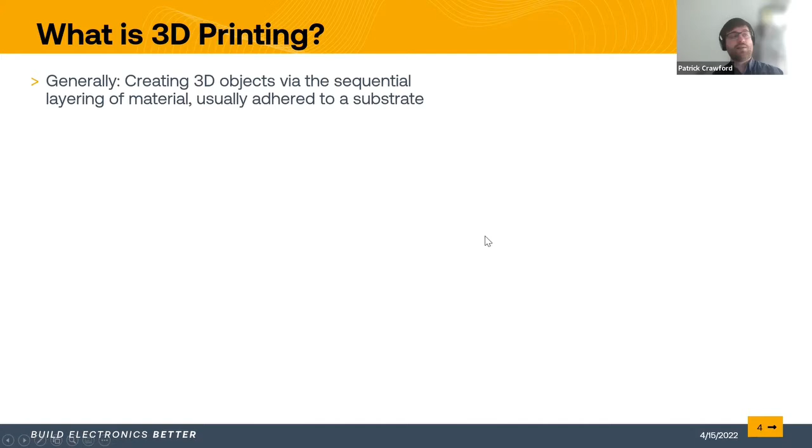And say, no, additive manufacturing can include etching and deposition. And I say, I've never heard a chemical deposition system referred to as a 3D printer. But you're going to hear it used interchangeably.

A wide range of industrial applications, way too many to include on one slide. We'll get into them, but suffice it to say it is useful from prototyping all the way through production.

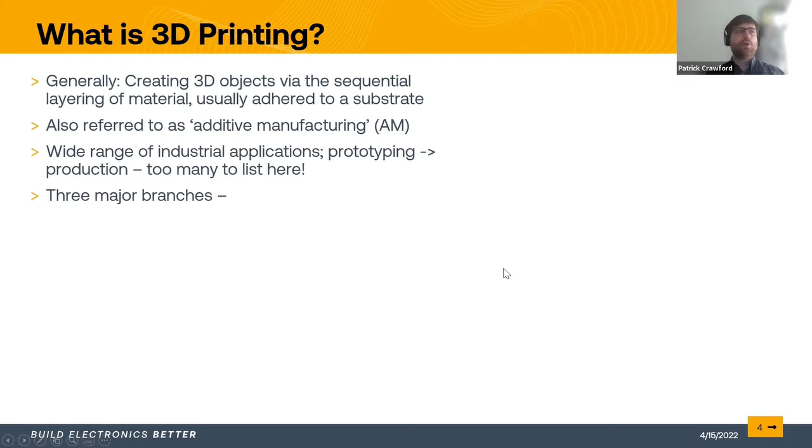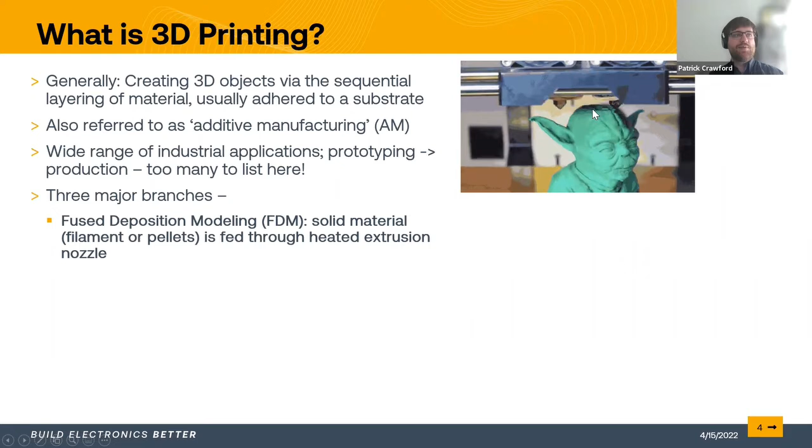So there are three major branches of 3D printing, if you will. Fused deposition modeling, or FDM, is when a solid material—either a filament or, in very rare instances, pellets—is fed through a heated extrusion nozzle. You can see here the nozzle depositing material as Yoda is being printed.

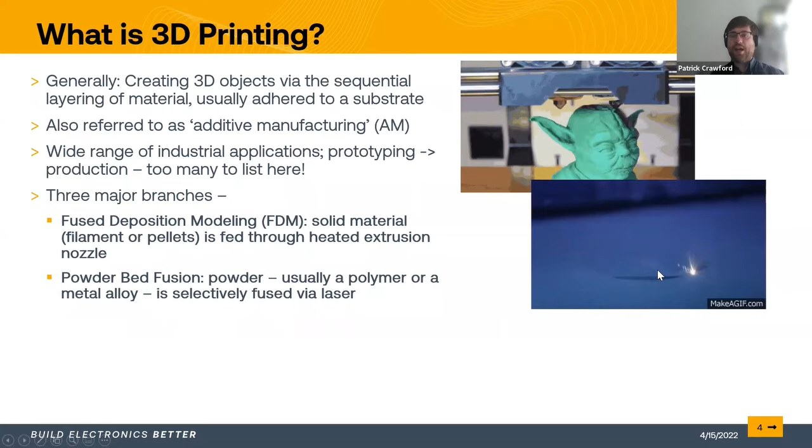Powder bed fusion: powder, usually a polymer or a metal alloy, is selectively fused via laser. You can see it's being rastered back and forth, actually fusing the powder together. That's a metal powder in this case, but it doesn't have to be metal.

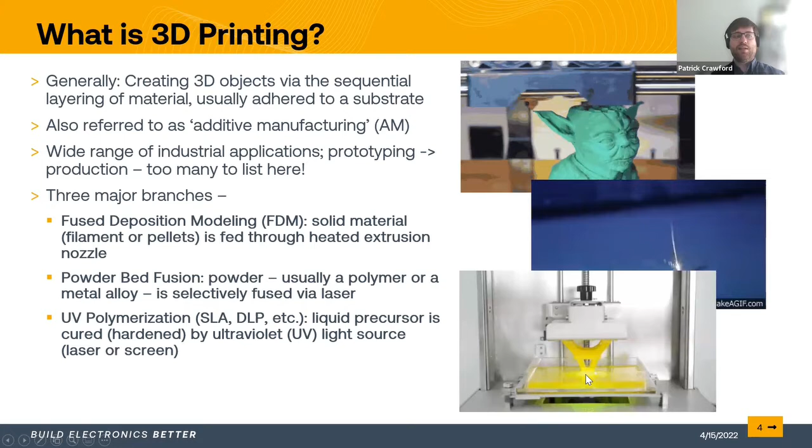And then UV polymerization—SLA, DLP, again we'll get into those initializations—a liquid precursor is cured or hardened by an ultraviolet light source. In this case there's an ultraviolet light below, and it is hardening as it moves up.

Okay, so I think it's really important to give context on the history of 3D printing, just to impress upon all of you how rapidly the last 5 or 6, 10 years have seen the proliferation of desktop and hobby-level 3D printers, and on the industrial side, the reduction in cost of these industrial scale machines that perform additive manufacturing.

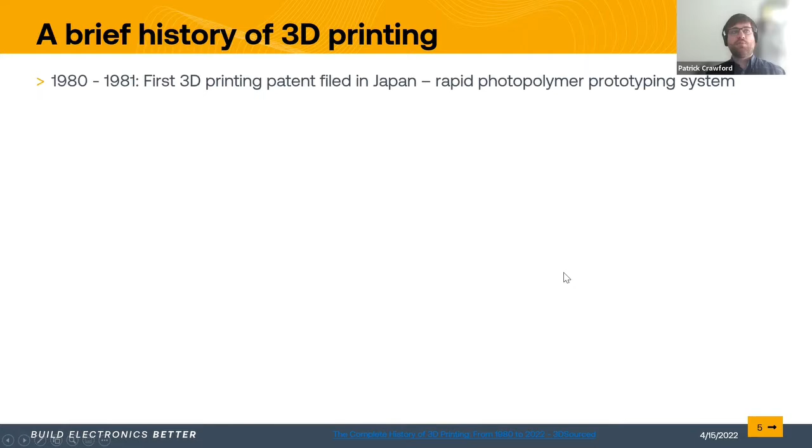And then in 1997, Aeromat patented and sold the first selective laser sintering machine, which could fuse only one metal: titanium alloys. That's it, no other metals. So up until that point, the average cost per unit—industrial, since there were no hobby units yet—was about 40 grand, not adjusted for inflation.

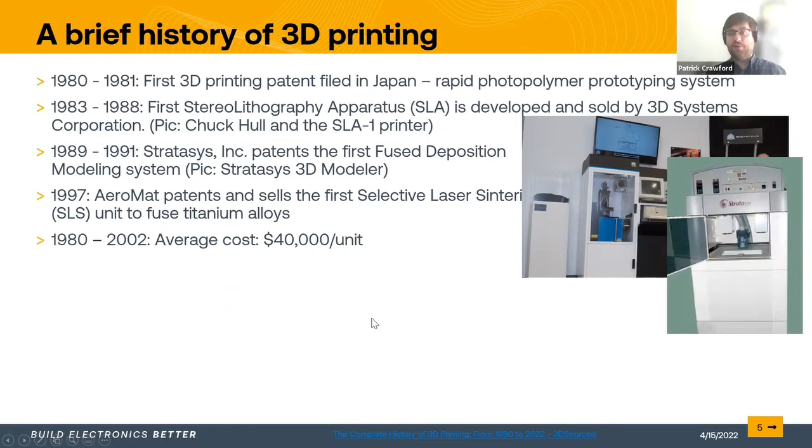In 2005, the RepRap project launched. The way they got around the Stratasys patent on FDM was they just said, here's some instructions on how theoretically one could build a printer. Have fun. Most of the parts were off the shelf, some were printed by other printers that your friend might have, and the control boards, which weren't necessarily patented, were sold by RepRap or authorized distributors.

However, in 2009, that patent did expire, and a couple of different things happened all at once. Thingiverse debuted, and MakerBot released the first, like, this is a 3D printer that we are selling kits.

And in 2014, similarly, the SLA and SLS patents expired. So since 2014, eight years ago now, the explosion in consumer level 3D printers of all flavors and the industrial explosion of 3D printers of all flavors have been due to these patents expiring. Now the average cost of printers, taking into account a wide variety of consumer level printers, is only about 350 bucks, with bigger build volumes and better quality than any of these industrial machines in the 80s and 90s ever had, give or take.

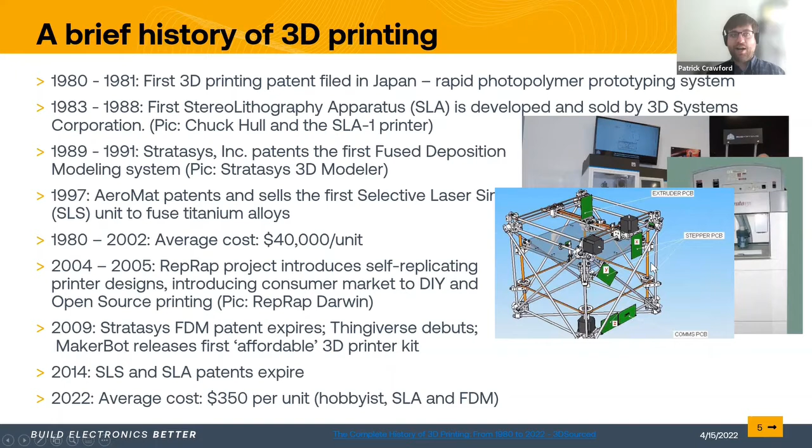What I'm not going to mention is all of this that has happened in the history of 3D printing. Scan this, Google something if you want. It's insane what has happened.

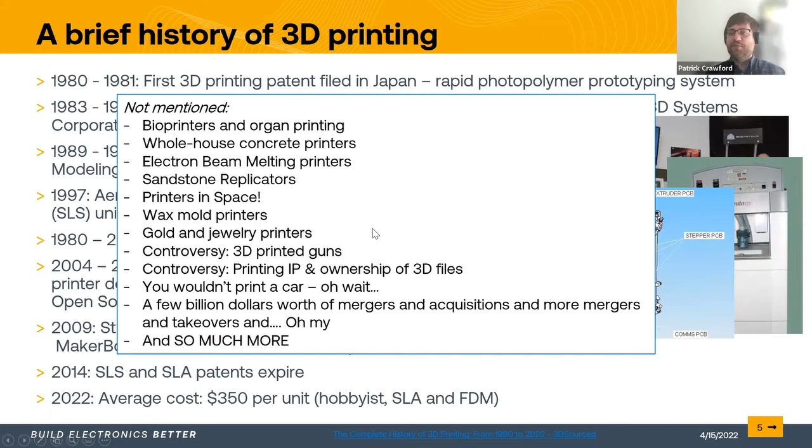A couple of highlights: the 3D printed gun controversy that is still ongoing. Who owns files, right? If I put a file on Thingiverse and then you print it and sell that print, do I own it? The answer is no, but there are similar IP issues, and all sorts of fun advances in the space of 3D printing.

So like I said, there are three arterial branches of printing: FDM, UV, and powder bed fusion. Within those, there are distinct technologies that have different applications. FDM is kind of just its own stub, its own truncating artery. There's different kinds of FDM printers, but it's the same basic technology.

UV does have a few different branches, though. They have SLA, which is stereolithography apparatus, digital light projection or DLP, and material jetting, sometimes referred to as MJ. In powder bed fusion, there is selective laser sintering (SLS), direct metal laser sintering (DMLS), or electron beam melting (EBM). There's also something called selective laser melting, which we'll talk about, and then binder jetting.

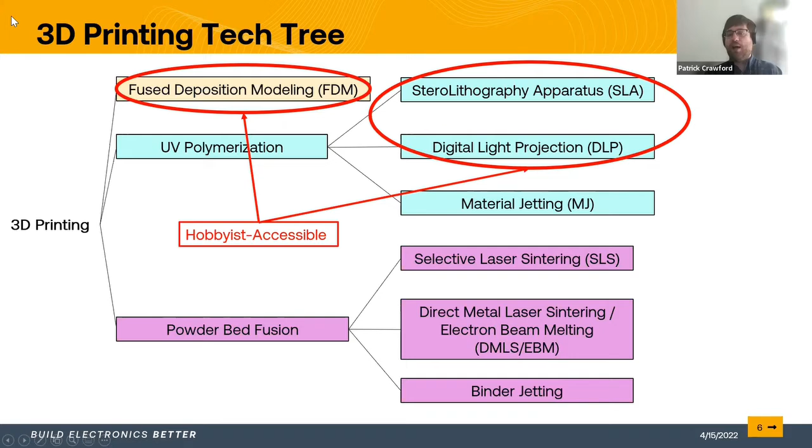So of those, and we'll talk about these at the end, if you want to get involved in 3D printing, the hobbyist accessible technologies are going to be FDM, some SLA units, and a lot of DLP units, or a flavor of DLP that we'll talk about.

Okay, so the first technology we're going to talk about is a powder bed fusion offshoot called Binder Jet 3D printing. This technology operates very similar to an inkjet. An inkjet printer has one line of ejectors that eject ink strategically so it can make an image. This does the same thing, but instead of printing onto paper, it prints onto a layer of powder, either metal, silica, or even some ceramics, often polymers, and it will spray a glue.

And then that layer will drop down, and another layer of powder will be pushed over, rinse and repeat. So you're actually gluing layers of powder together. There are some upsides to this.

This is a low to no heat process. Oftentimes, the more variables we have in a system, especially a complicated system like this, the more prone to failure it can be. Without heat profiles to worry about, ramp rates, all of that, you have fewer failures when you're actually printing.

This is, however, almost exclusively used for industrial applications. Kind of makes sense, it's very power consumptive. It's a big unit, we'll take a look at a video in a second. Like I said, different materials. We're not going to worry too much about the actual characteristics of the machines, but suffice it to say they can be pretty crude. It's not as fine as some other technologies are.

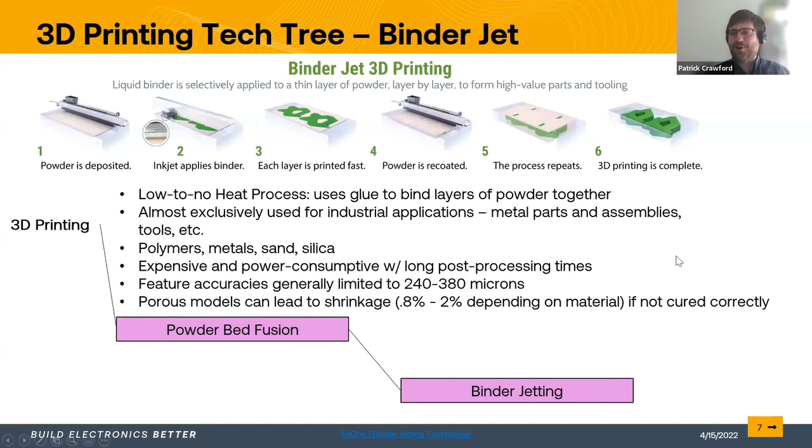That's right, forgot that my PowerPoint is misleading - it's truncated here. So we're going to take a look at a video of binderjet manufacturing, just so you can see what it looks like when it's running. Let me go ahead and pick it up.

All right, guys, this is using pretty similar technology as what we've already talked about, but I want to show the technology of binder jet. Aaron, is my sound coming through?

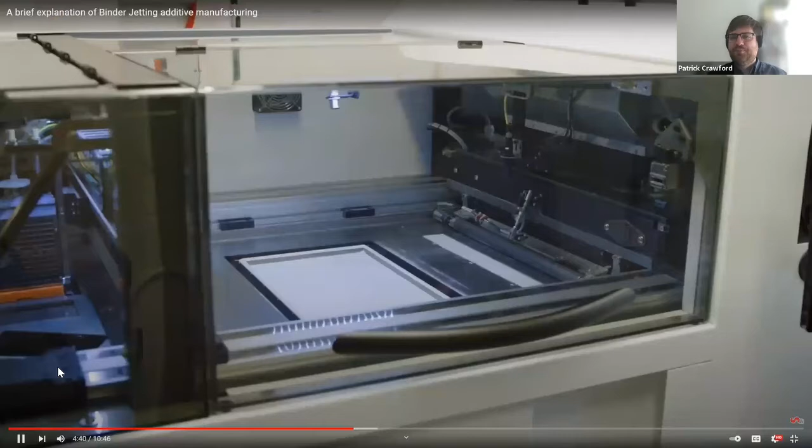In this process, a liquid binder is selectively deposited on a powder bed with a print head. It is a growing process that allows the production of parts for the manufacturing, medical, and dental industries. This technique enables the production of metallic and ceramic parts, as well as sand molds for castings. To start the process, a 3D drawing is imported into the printer software.

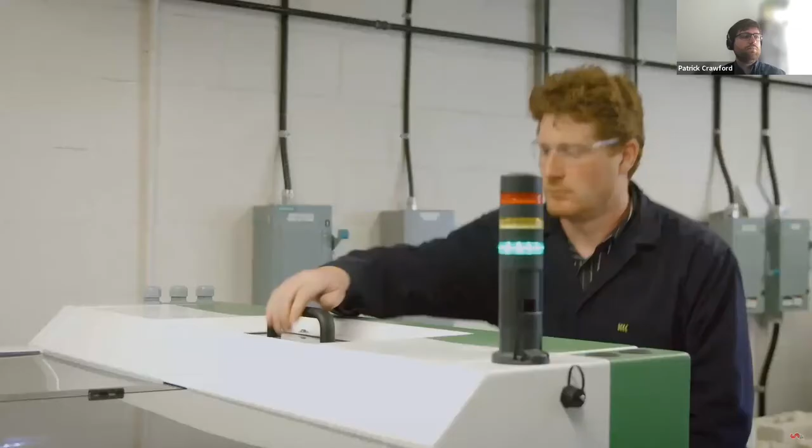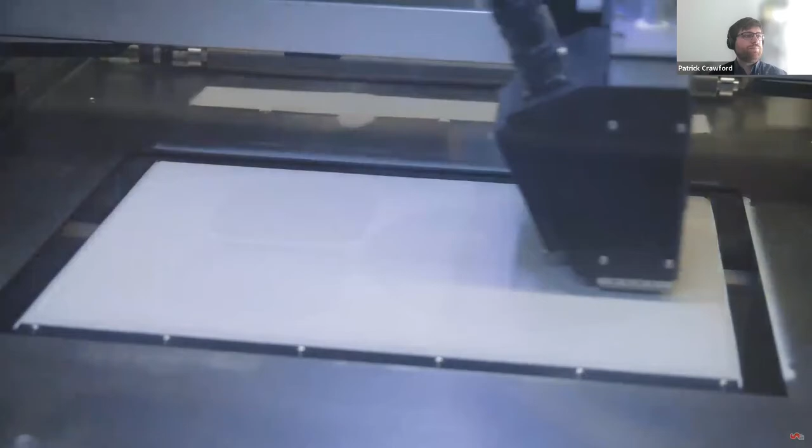The powder to be used is placed in a dispenser, which ensures a constant supply during printing. First, a powder layer of a specific thickness is spread. Thereafter, the printing head, moving on two axes, projects the binder where necessary. Before moving on to the next layer, the solvent contained in the binder is evaporated by an incandescent lamp.

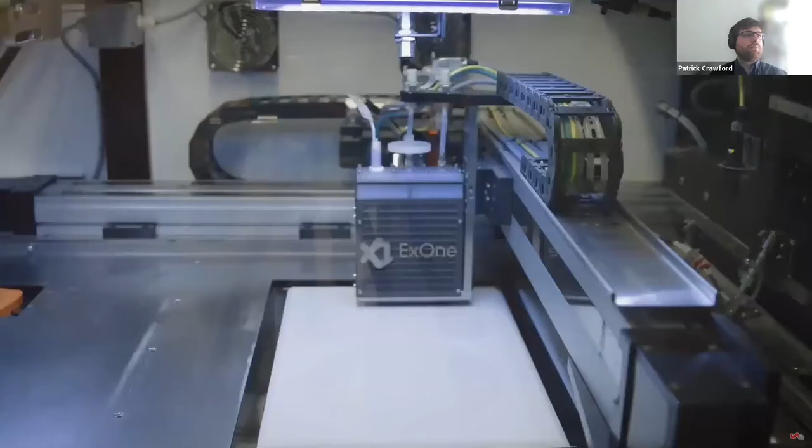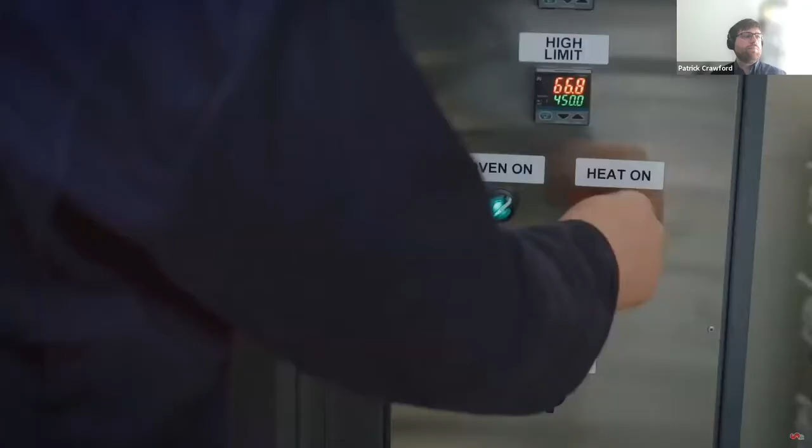The powder bed is then lowered and a new powder layer is deposited. Therefore, the production takes place in a series of steps that build the part layer by layer. When the cycle is completed, the binder is cured by placing the container in a furnace. The temperature and time depend on the type of binder employed during printing.

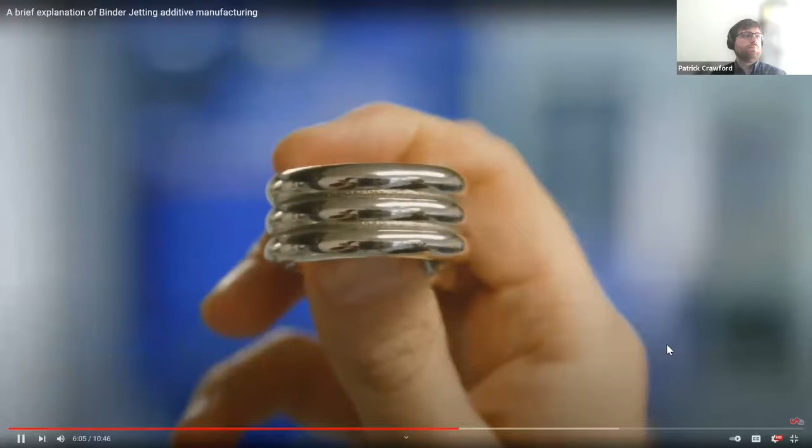After this step, unbound particles are removed to reveal the part or the mold. The sand molds are then ready to be used in foundries. The metal and ceramic parts must undergo sintering, infiltration, heat treatment, or hot isostatic pressing before being used.

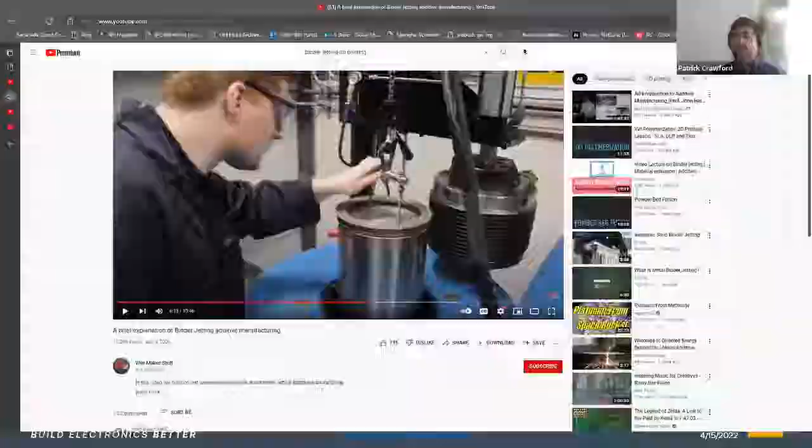All right, so you have these post-processing steps that are necessary with binder jetting that aren't needed with other types of 3D printing technologies.

Okay, cool. So this is awesome, you can do some cool stuff with it. Where are you doing cool things with binder jetting? What industries does this apply to?

The first one they kind of mentioned is medical. This is used a lot for dental implants, for things that need to be coated - but once they're coated with the post-processing, it doesn't really matter the strength profile or anything like that. So they use it a lot in dental applications.

This is something that is used quite a bit in aerospace. You'll see a common theme, which is that pretty much all of these technologies are used all the time in aerospace. I think if these aerospace companies had their way, there would just be a hangar that was a 3D printer and it would just print an entire plane and they could fly it off, because pretty much everything is made with additive.

With this binder jet technology though, what you'll find is that the mechanical properties are anisotropic, or non-isotropic. I won't get too much into the details, but because you have layers bound together with glue, even if they've been sintered in the case of metal or fused in the case of the polymer, you're still going to have different breaking points, to keep it general, in different directions of the material.

So this is not going to be used for loading necessarily. It is used for non-load bearing parts or aesthetic parts even.

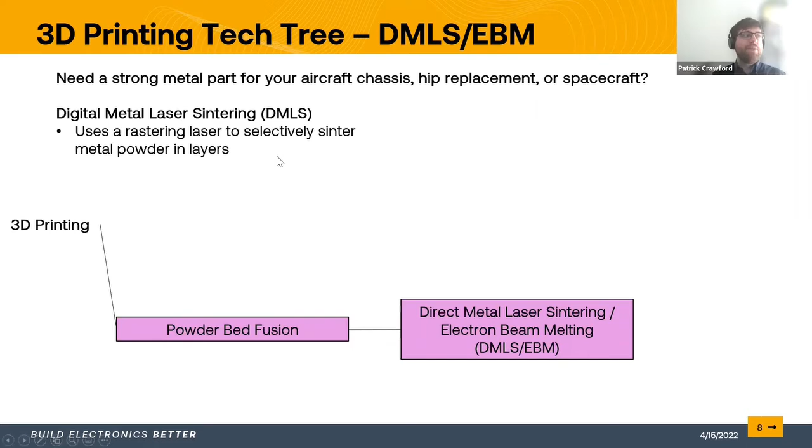Selective laser melting is used for pure metals. So if you just want to fuse together a whole bunch of gold, or if you want to fuse together a whole bunch of just elemental titanium or something like that, there's use cases for that. For the sake of this presentation, we're just going to talk about DMLS. We're going to ignore some of the attributes we don't really need to worry about.

This technology is going to have some applications that you could just not do with other technologies, specifically in the aerospace industry. I talked about how there were instances where, because of the materials properties and mechanical properties of binder jetting, you wouldn't necessarily want a load-bearing member or a flexural member made out of something with binder jetting. You absolutely could with DMLS.

You are going to find instances where this is used in tooling, especially in the forging industry, where you have these massive slabs of metal that need to be moved around in a specific way. DMLS is going to be handy to make specific tooling for that. Touching on SLM a little bit, I said you can fuse elemental metal. If you're a jeweler, you could actually use SLM to make rings or other jewelry items. If you couldn't tell, I'm not a jewelry guy, so I just know rings. That's the one I know.

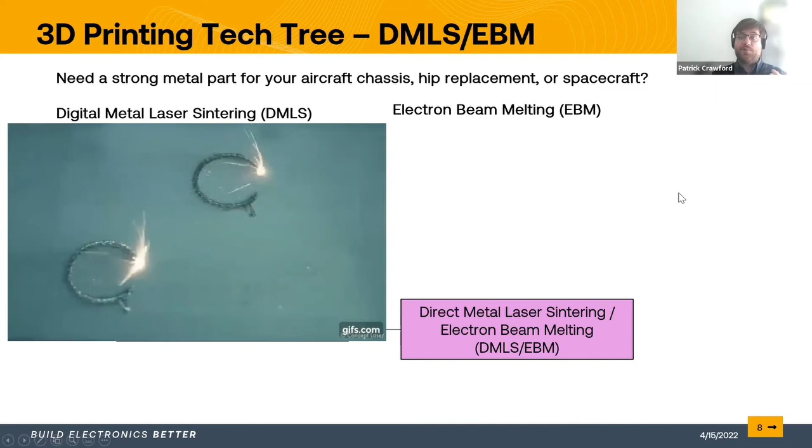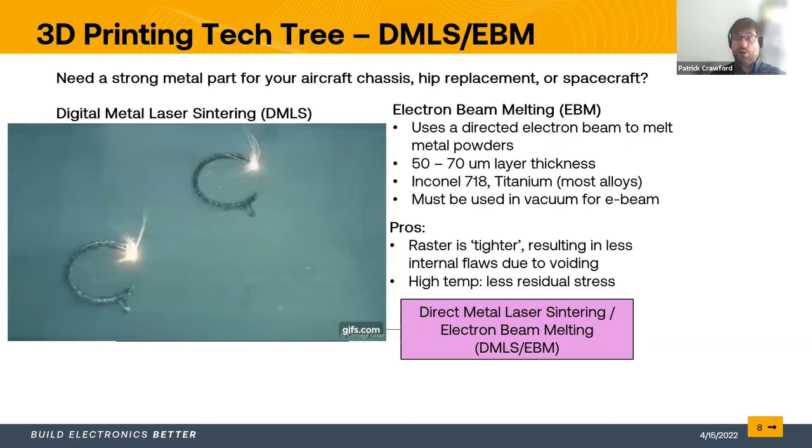The other thing you can do with metal is electron beam melting. Electron beam melting does actually melt the metal or the alloy. There are pros and cons between the two. Suffice it to say that most companies, I think almost all, that create units for sale are doing DMLS. Most companies then, by transitive property, are offering DMLS services, so much so that I couldn't even find an in situ video of electron beam melting. Suffice to say, know that these two exist. These are how you can fuse metal to make 3D parts.

Let's talk a little bit about the industries. Same rules apply from before. If you want to get involved in actually doing R&D, creating these machines, you're going to want to be looking at maybe having a higher education degree, maybe some experience with vacuum systems for EBM, some experience with laser systems for DMLS, and you're probably going to want a pretty solid materials science background, especially when it comes to looking at these systems that aren't quite melting the metal, they're fusing the metal.

You have to worry about whether this will work on different alloys. You have to actually spec out the density of the powder that can be used. You're worrying about things like having a bunch of powder sitting in a vat that is essentially being ablated. You have to worry about the enclosure, and you have to worry about human health and safety when you're designing these systems.

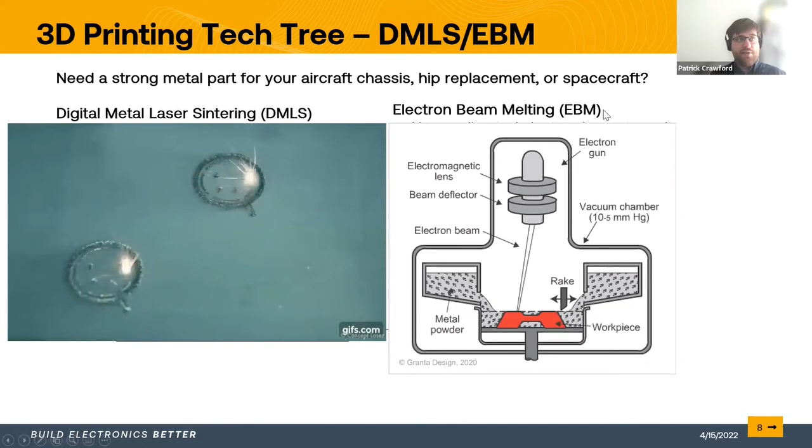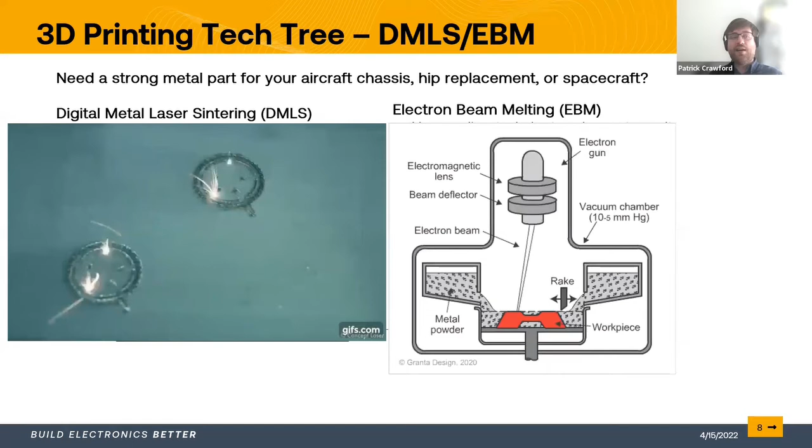If you just Google DMLS, the top 4 or 5 companies are basically going to be the ones SEO has decided are getting the most traffic. It won't be too hard to find them. I highly recommend looking at their jobs pages if you find this interesting. Some of them are hiring for additive engineer positions. Those are the kind of positions you'll find with these two: additive engineers, chemical engineers, and a lot of electronics engineers to work on the control boards and wiring harnesses.

Okay, and then you might be thinking, cool, you can fuse metal. How about something a little lighter, like maybe a polymer? So SLS, selective laser sintering, is exactly that. It is basically DMLS, but for polymers. This has almost completely different use cases because it can sinter most polymers—polyamides, polystyrene, thermoplastic elastomers—things that have different material properties and serve different mechanical functions.

If you need something flexible or lightweight, maybe you're using a generative design tool to come up with cool honeycomb structures inside of, for example, motorsports parts. A lot of motorsports cars are looking at generative design with sintered polymers to make super lightweight members for racing cars. You would look toward SLS.

So this technology is awesome. It's the fastest additive process if you care about speed when producing your parts. Unfortunately, though, it is not suitable for harsh conditions, even if you really treat it, because it's very porous generally speaking when you are done sintering the part.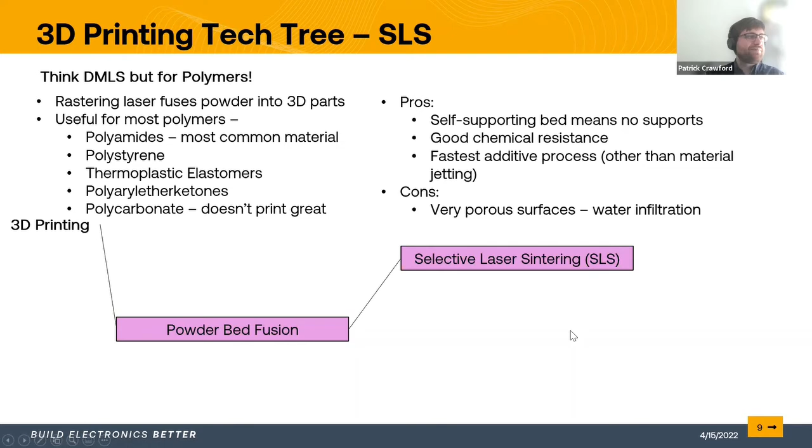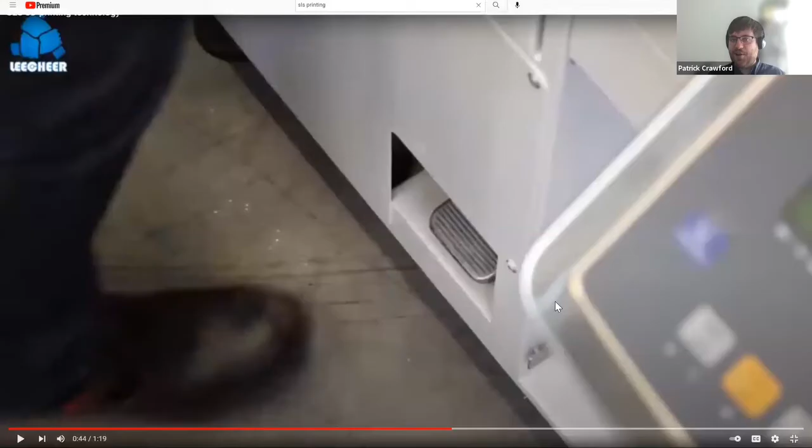Same as before, give it a Google—I apologize for not having the top 5 list on here. The one thing about these, if you're looking at it from a process standpoint, is the cleanup is atrocious. So I am going to share a video of the post-processing just to give you an idea of what it's like to clean up after one of these. My call to action: someone in the audience, please invent a cleaner way of doing this so I can put one of these in my living room when they scale down in size.

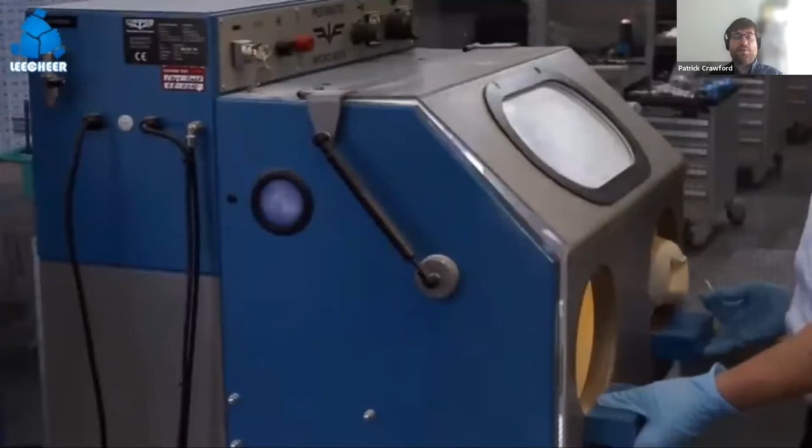So here's what it looks like—I'm going to mute that awful stock music because it gives me a headache. Here you can see once the part has been sintered, it is still suspended in the workspace full of powder. What this individual is doing right now is removing the parts from the powder. Now you actually have to clean all the work surfaces—that's a filter he's sandblasting right now. But you do get a pretty cool, fairly unique looking part out of it. I don't know what that's for, but this gives you an idea of the post-processing that's necessary.

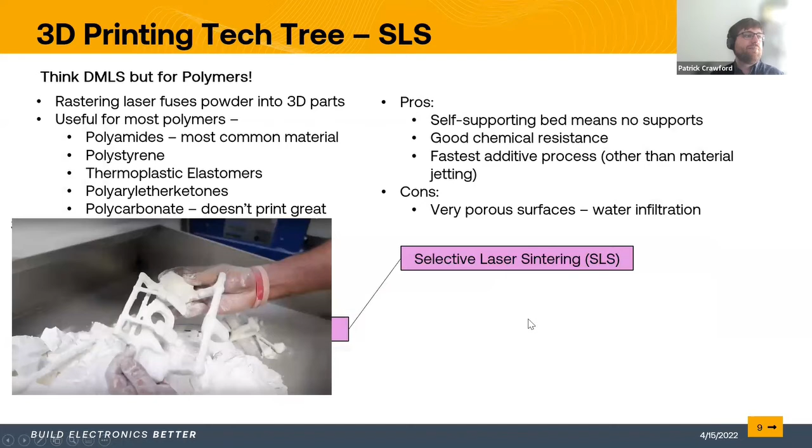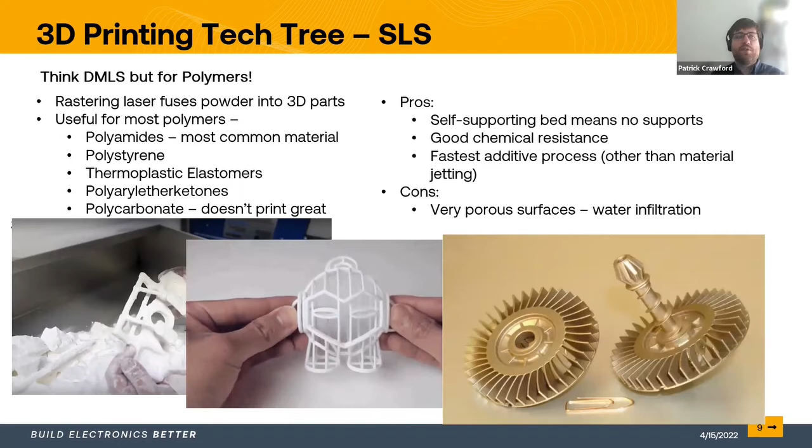But you do get some cool parts. This one's a little squishy, made out of some long chain polymer that is flexible. And you can do some pretty cool coatings. These look like an impeller or something, coated with some kind of metal. I don't actually know, but it looks cool. It looks like it's a little bit more robust than your typical polymer.

Okay, now we're getting into the UV polymerization path. From here, especially when you're looking for jobs creating or utilizing these machines, they are less prevalent than FDM or powder bed fusion. There's some reasons why.

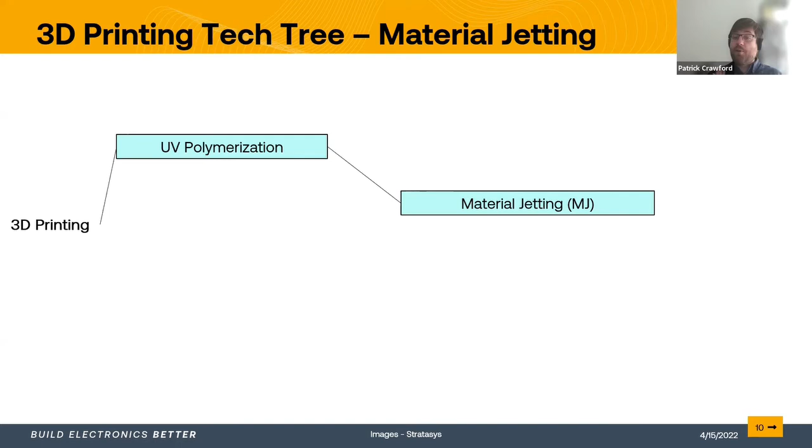First, we're going to talk about material jetting. Material jetting is really, really cool. I am super stoked for when this scales. Basically what you do is similar to binder jetting: you move across in one fell swoop with a liquid. But this liquid is a photopolymer. What that means is when it's hit with UV light, it hardens. It has a bunch of monomers floating around.

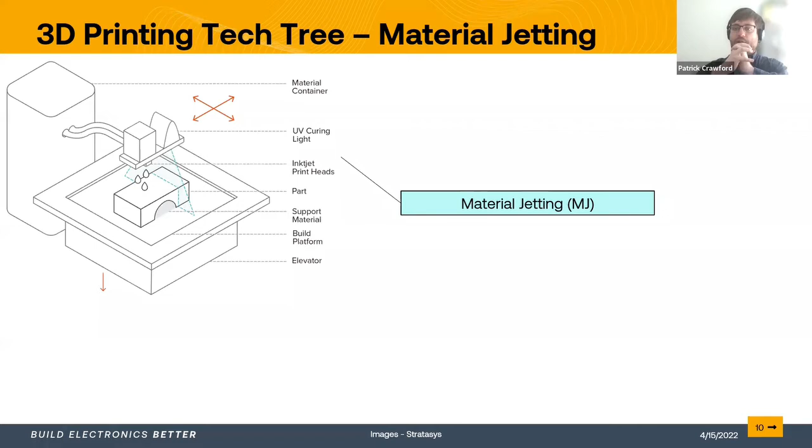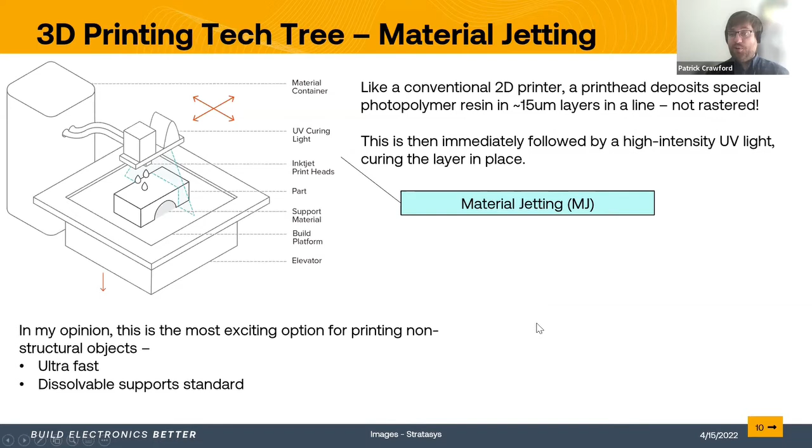As soon as UV light hits, they kind of harden up. After the liquid is deposited, immediately after is a high intensity UV light, so it cures it right away. What you get from this is an ultra fast process with dissolvable supports built in, because you can mix up what fluids come out of that print head, and do multicolored material right away.

So here's an example of multi-material. This is some cover for, I don't know, a walkie-talkie or something. And here's an example of multicoloring. This is without any post-processing whatsoever, maybe a little bit of polish on the external layer.

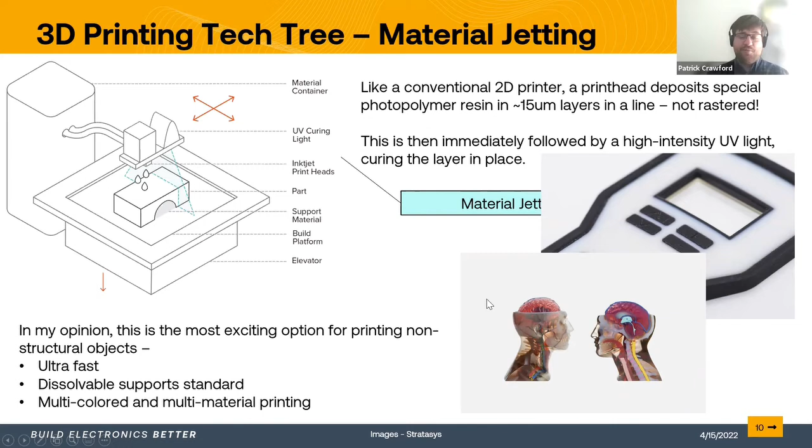Why isn't this everywhere? It's a good question. Why am I not going to tell you all the different career paths and job opportunities for this? Because it is just so expensive that no one is using it. The machines themselves aren't that expensive, only about $30,000.

I know that's not expensive, but the materials are stupid expensive, up to $1,000 per kilogram. Imagine passing that on to your customers - that's not really a value-added proposition to your services. It's because the IP right now is owned by Stratasys, and they sell all the resin. I think soon they might license that out to other companies, but for right now, not happening. So like I said, I'm not going to get into what industries it's used in - right now it's just kind of a tech demo, but it's very cool.

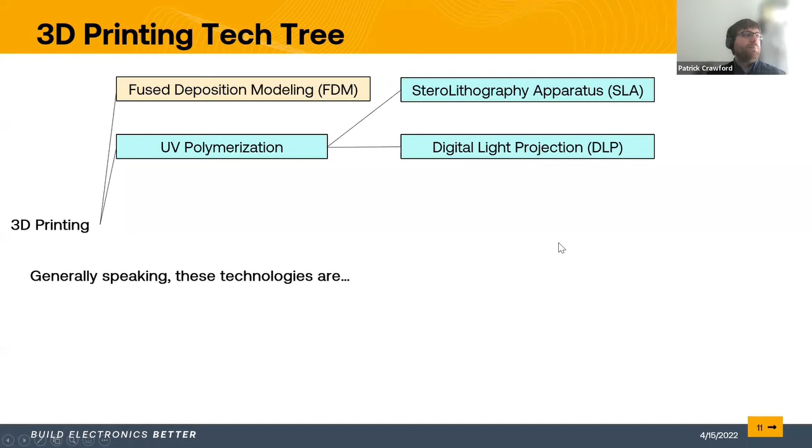Okay, sorry, let me skip past some of this stuff here. But it's important to point out that these technologies are a little bit more hobbyist friendly. If you want to start building that resume, if you want to work with these technologies, especially if you're in high school, these are what you can purchase yourself, set up in your living room, and start playing with. Let me find a good place to pause for a second.

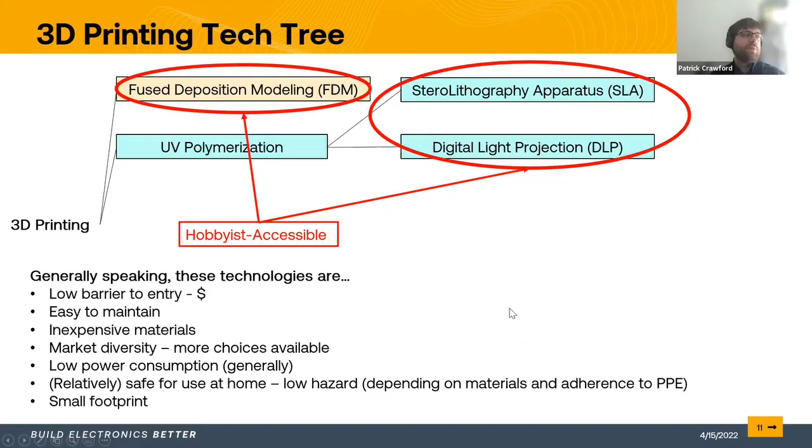Before I move on, I did have a couple awesome slides on additive manufacturing for electronics. IPC is a trade association and standards development organization for the electronics manufacturing industry. So of course I wanted to talk about what it means to 3D print a printed circuit board. I'm going to let Nano Dimension take 50 seconds to talk about their Dragonfly machine.

And this is what actually prints PCBs. Nano Dimension is a company that has showcased their machines at IPC Apex before. It's exactly what it sounds like - it's a 3D printer for PCBs. So I will share this... oh, it just started, that's nice.

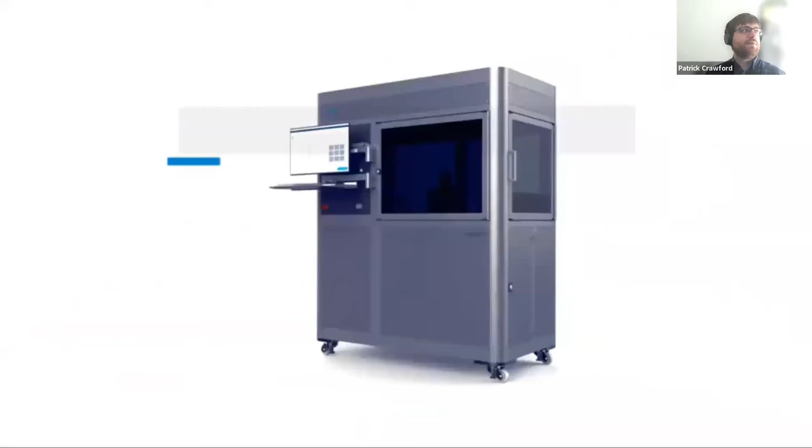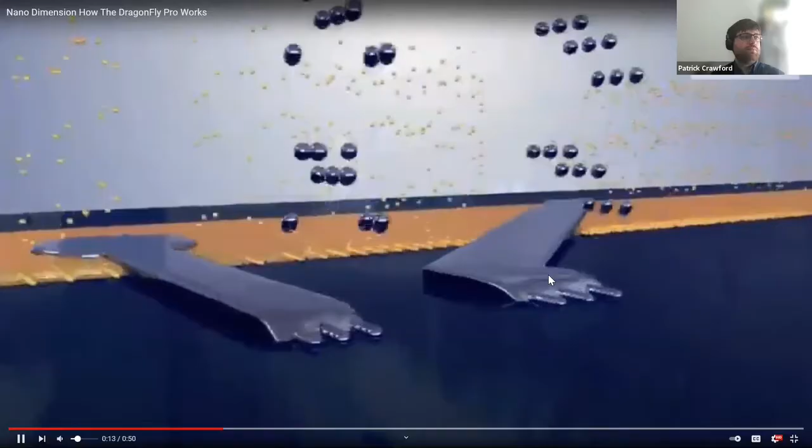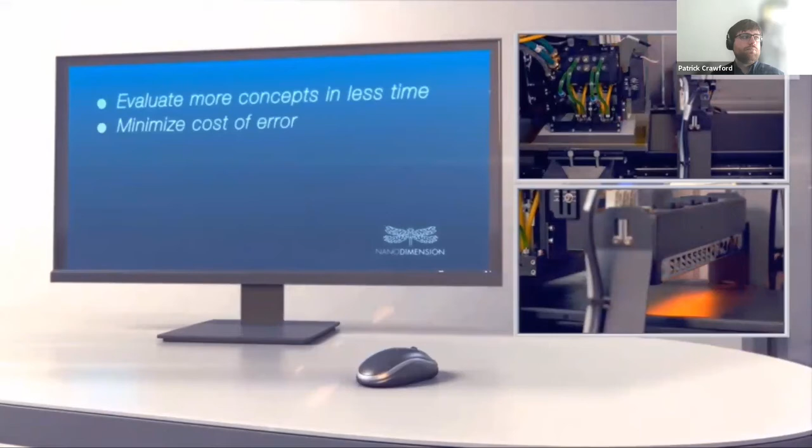Our DragonFly Pro 3D printer is capable of depositing both electrically conductive and insulating materials, enabling designers and engineers to print fully functional electronics in-house in one print job. Companies are already using this multi-material solution to bring speed and efficiency to their development and manufacturing processes, reduce lead times and cost, and create opportunities for design innovation.

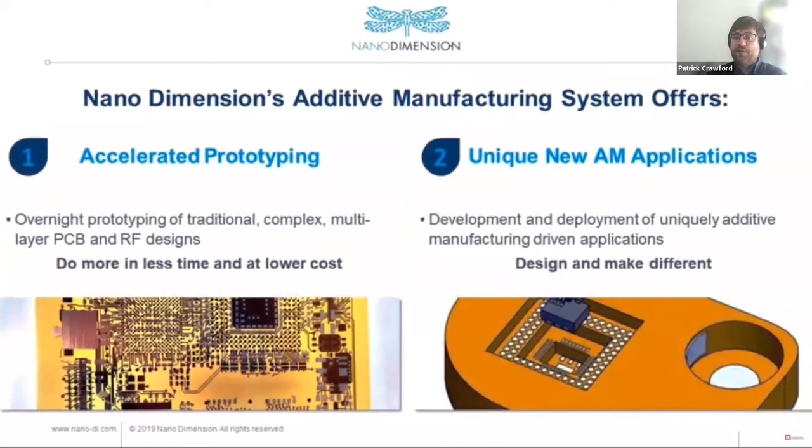So it's exactly what it looks like. It is a printer capable of depositing conductive material and insulating material. This bypasses the usual masking and etching, the different stencil layers you need to put down that are traditionally used to make electronic devices, PCBs. You can just bypass all of that. This is capable, from what I understand, of passive embedded devices, things like capacitors and resistors.

However, it's also capable of some pretty sweet geometries. Let's say you want to put an inductive loop in - you can just have it at any angle you want. Let's say you want a really sensitive 3-axis sensor for something - it doesn't have to be X, Y, and Z, it can be any angle. So there's some really cool opportunities for electronics design within these printed additive manufactured PCBs.

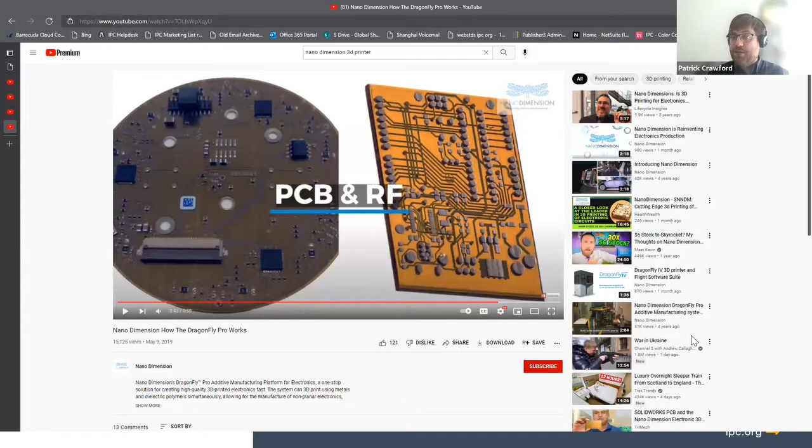All right, so I really quickly want to go through FDM, which is fused deposition modeling. For the sake of this talk, I'm not really going to dwell on all of the physics and the chemistry, just because who really cares and we don't have a lot of time.

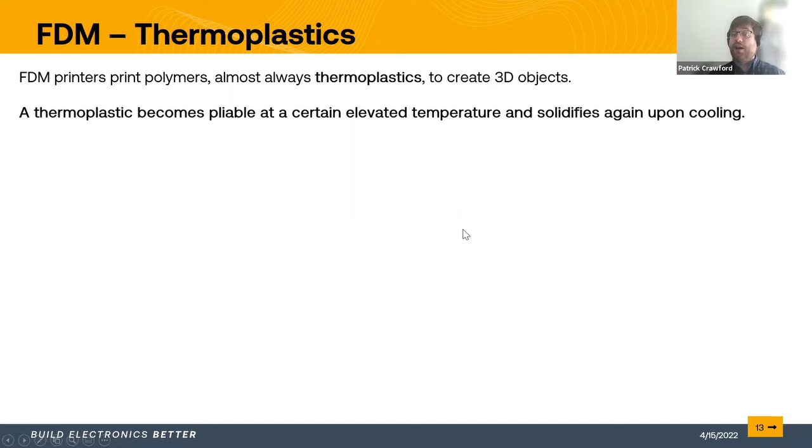So FDM, fused deposition modeling, uses thermoplastics. In brief, thermoplastics become pliable at an elevated temperature and solidify upon cooling. Long-chain polymers, tensile strength, yield strength, they're non-Newtonian fluids. We don't need to worry about that right now.

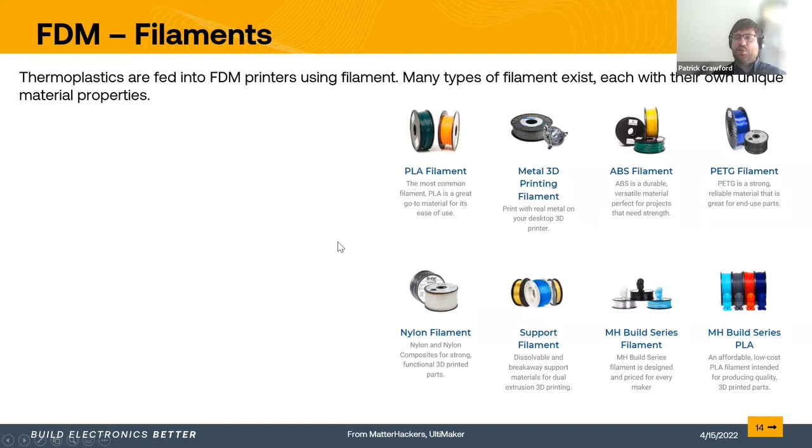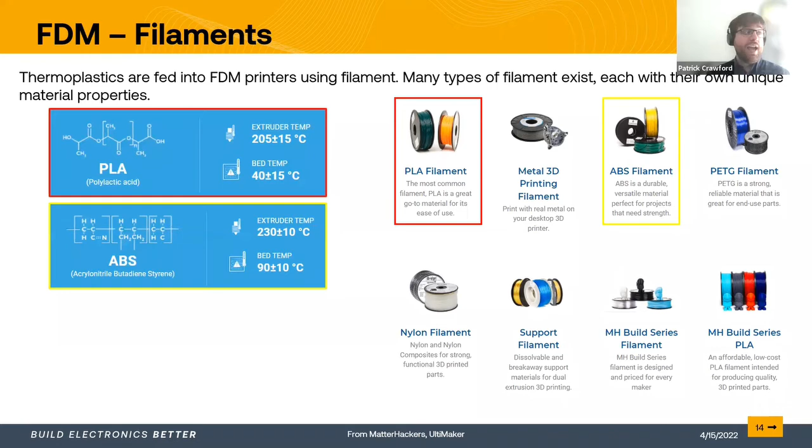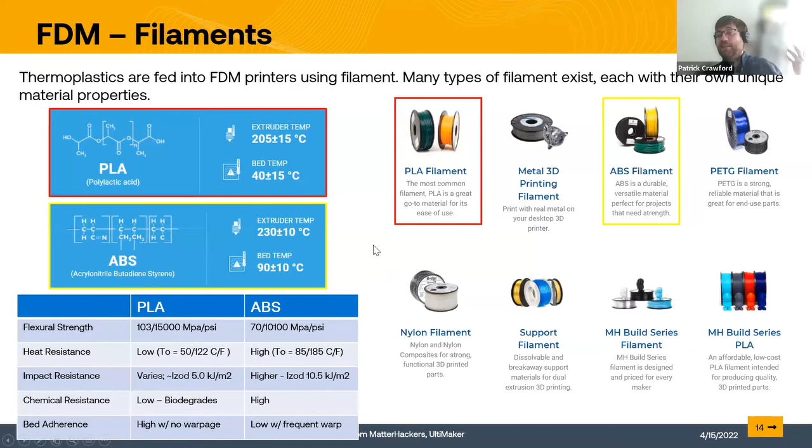So FDM printers use filament. The thermoplastic is fed into the printer. Key to know is that there are so many different kinds of filaments now that serve so many different niches, all with material properties suited to different applications. The most commonly used are PLA and ABS, polylactic acid and acrylonitrile butadiene styrene. They each have different use cases. PLA you're going to want to use for static loading, and ABS you're going to want to use for dynamic loading. That's basically what you need to remember. Here's an example between the two.

Something I've saved until now, because it's true for all of these additive manufacturing technologies, is that just like a PCB needs a PCB designer to actually do the work in Altium or whatever before it can be fabricated, you obviously need a CAD engineer doing the work before any part can be printed. A lot of the time that job, especially in a smaller company, is rolled into a mechanical engineer's role. If there are any mechanical engineering students on the line, SolidWorks, am I right? Yeah, we're used to having to do the CAD work.

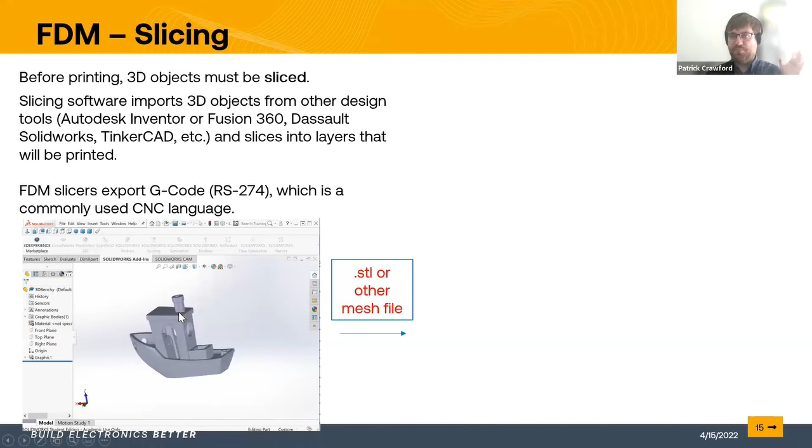But sometimes there are dedicated CAD engineers, especially at larger companies. Sometimes there are roles that are exclusively additive manufacturing engineers, like I mentioned earlier. All they do is take the CAD file, feed it into the machine, post-process the print, and ship it off to metrology or quality control. Regardless, you're probably going to want to know how to do some CAD work if you're working in additive manufacturing. At the very least, you'll need to know your way around the end stage.

Maybe you just import a file and export to STL, then use a slicing tool. For a hobbyist, I highly recommend Cura. When you get into industrial level machines, they often come with a proprietary slicing tool that you'll use at work.

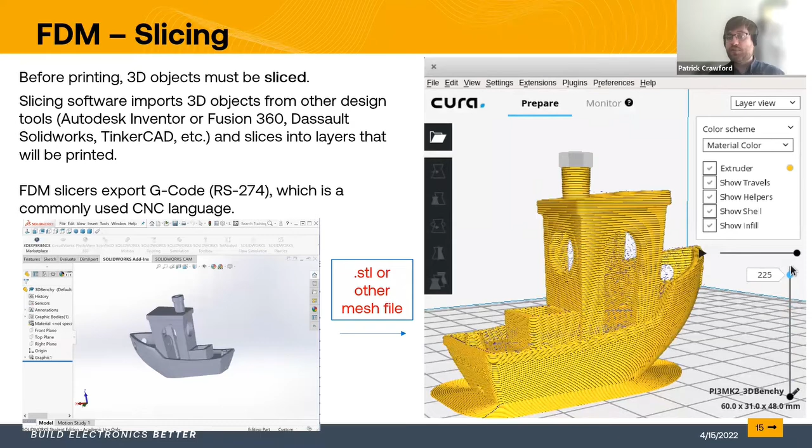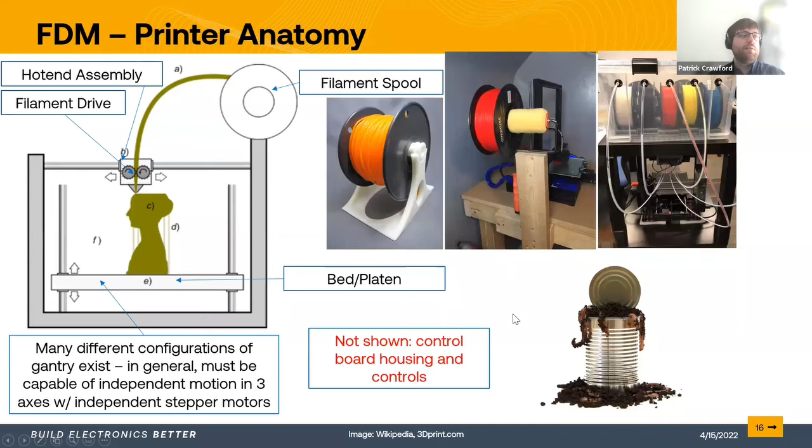So there are different bed materials that you can use. I'm not going to dwell too much on this since I'm running out of time. Suffice it to say there are different materials you can use for your substrate depending on what you want to print. And then all sorts of troubleshooting you have to do if things fail - if anyone has hit 3D printing on TikTok and watched the live feeds, like 90% of it is just string shooting out of a printer because no one knows how to tune their printer anymore.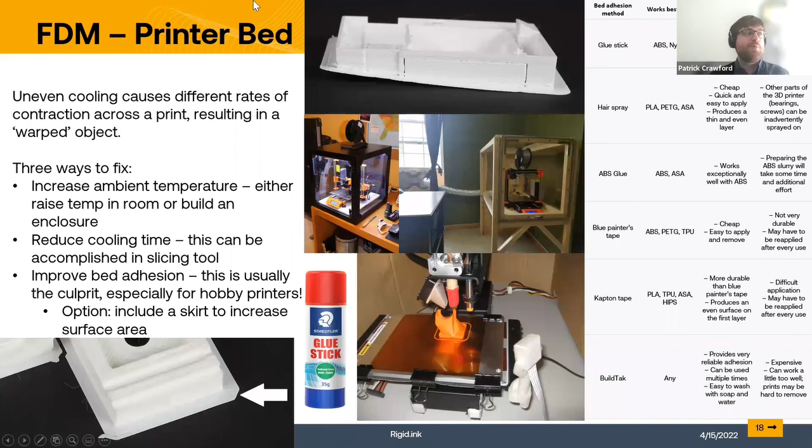Most of it's due to warpage. As for drive type, I'm biased - I think a direct drive is the way to go.

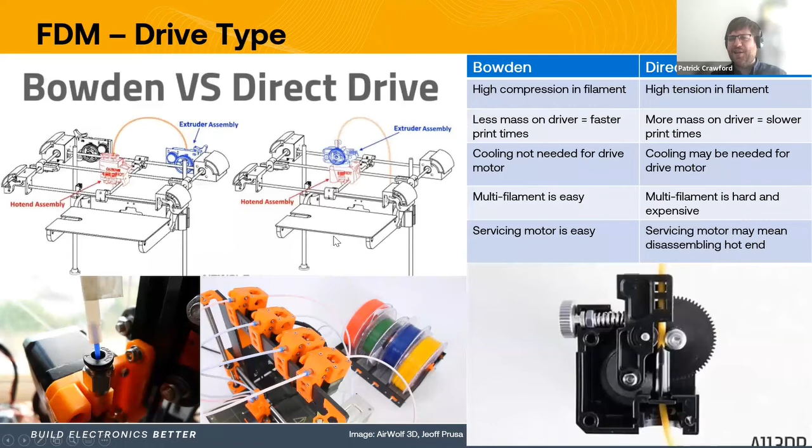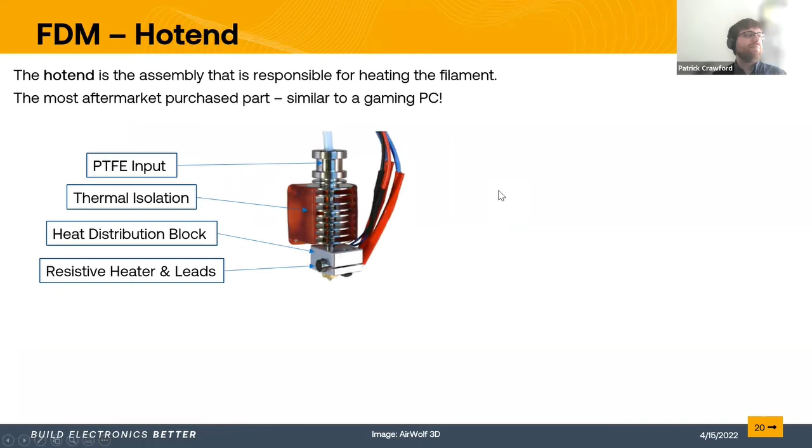Okay, so FDM, fused deposition modeling, is everywhere. SLS, selective laser sintering - the Space Launch System that NASA is working on has a lot of 3D printed components everywhere. I think it was the Falcon Heavy that had a 3D printed fuel tank, or maybe it was the oxidizer tank that was 3D printed. I could be wrong, I'm perfectly willing to be wrong on that. Point being, these things are showing up everywhere.

3D printing, especially with FDM, is scalable. So get good with these printers, put them on your resume, get an awesome job. But also work with these things, put a couple in your garage, go onto Fiverr, sell your prints as services. There's different ways you can make some side cash, especially if you're trying to put yourself through school using 3D printing. Just want to put that out there, let it germinate in your minds.

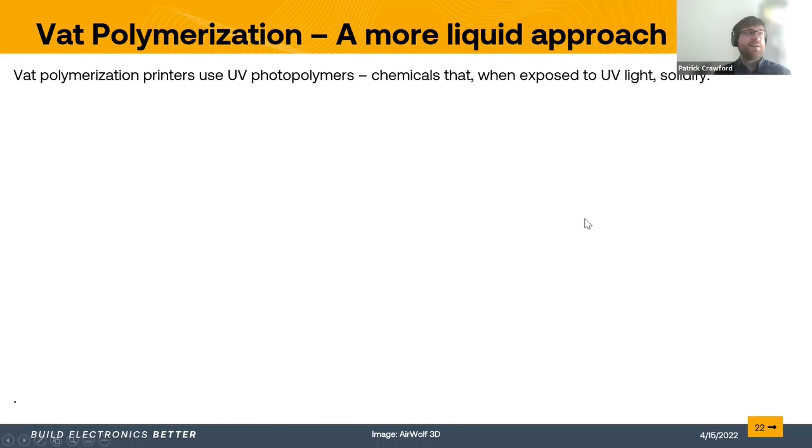Finally, a more liquid approach - I'll get through this pretty quick - is SLA and DLP. This is much more accessible for hobbyists than other UV polymerization technologies. This is an Elegoo, which is actually what we have behind me. You pull out of a vat, and every time you pull out, you flash either an image of UV light for digital light projection, or a laser, a UV laser, for stereolithography. That's really the difference between the two - every time you pull out, you flash an image that corresponds to a layer.

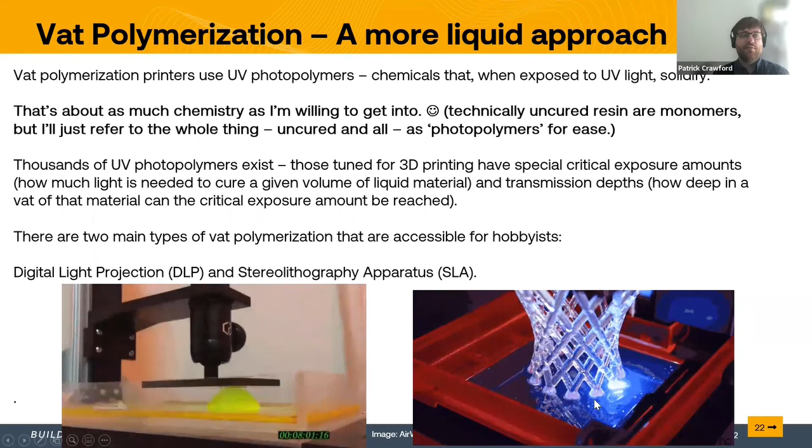After 10 hours, you've got yourself a 3D object. So this is the difference - this is DLP, and in an SLA you can see the laser rastering through.

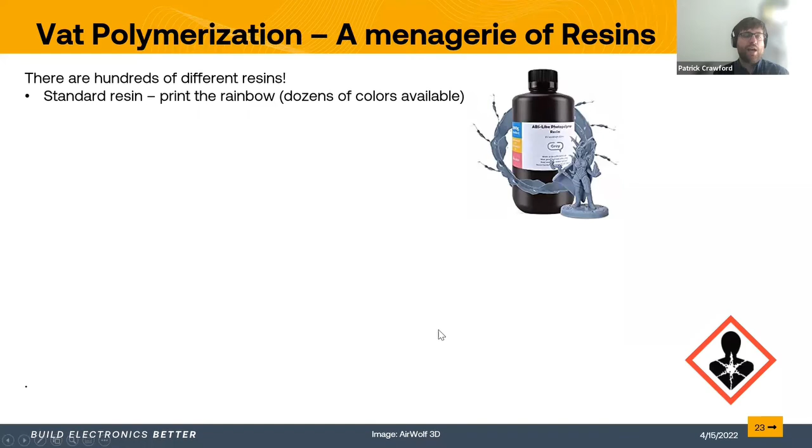Just like with filament, there are more resins than there are atoms in the grains of sand on a beach. Don't need to dwell on it - any use case, any application, you can find a resin for.

The only thing I will say, I have to mention this because I'm huge on human environmental safety, is this stuff is nasty. It is a VOC - it off-gases volatile organic compounds which can cause cancer. They're skin sensitizers and respiratory irritants. You have to wear a respirator and gloves, and it is incredibly harmful to aquatic life. You cannot dump this stuff down the drain. I would be remiss if I didn't bring that up.

Now, with that scary stuff out of the way, I do recommend you pick one of these things up. They're very cool - all it takes is a little bit of common sense, a respirator and gloves.

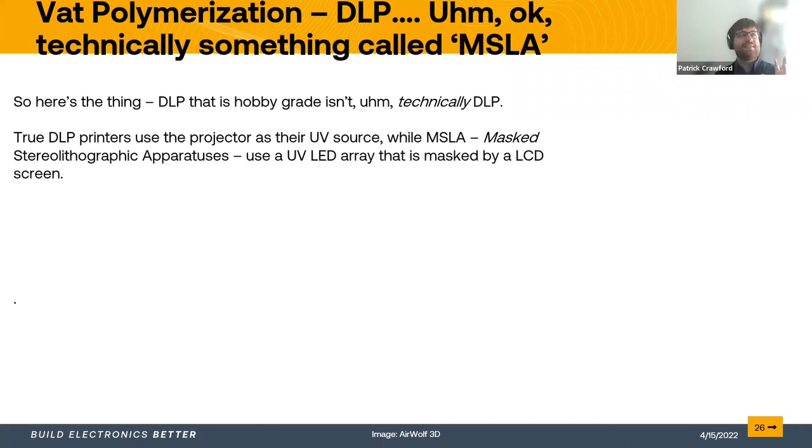I'm not going to jump into this because I want to leave time for Q&A. Yeah, static image, okay. Technically, the printers I have are called masked stereolithography. You can read the slides later - not that big a deal. Does it matter? No.

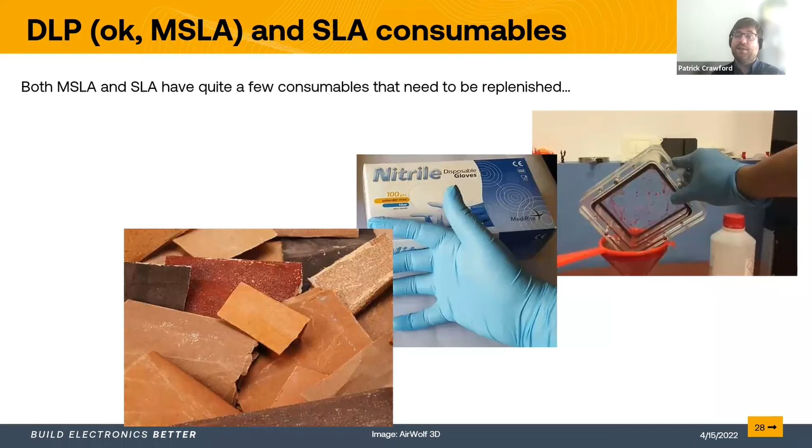Okay, lots of disposables and consumables for this kind of UV technology. In an industrial setting, you can imagine the resources one burns through when you have to clean tanks with isopropyl alcohol or chlorinated solvents, as opposed to little bottles of rubbing alcohol. It's something to think about, especially if you get a job and want to recommend a printing technology - you have to keep these things into account.

Okay, and the last thing I'll say is, which do you use? As a hobbyist, it's not really going to matter too much. If you want to print delicate miniatures, things with very fine detail, an SLA or a DLP printer or an MSLA is right for you. If you want to print more robust structural models, like wire racks or drone chassis or cosplay armor that you're going to be wearing for 10 hours at E3 or whatever, you're going to want an FDM printer. There are other things that will influence your choice.

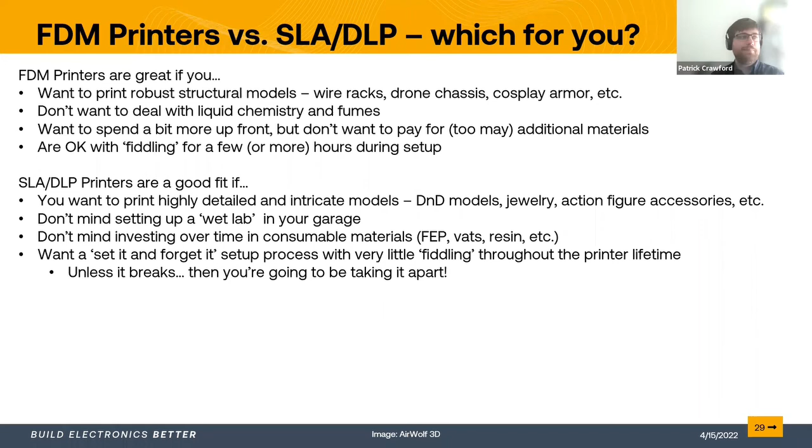Okay, finally, super quickly, I'll let you guys read these slides when I give them out. Just some recommendations for you before I go. For FDM printers, you cannot go wrong with Creality, cannot go wrong with an Ender. These are high quality, tried and true, they will not break on you. Monoprice is good, Anycubic is okay.

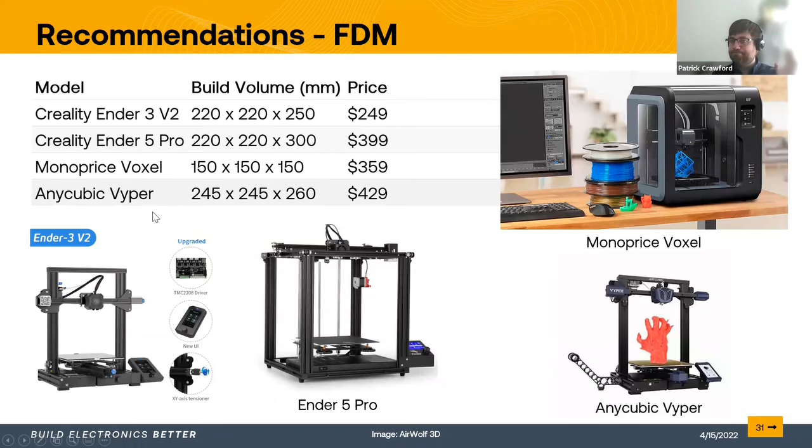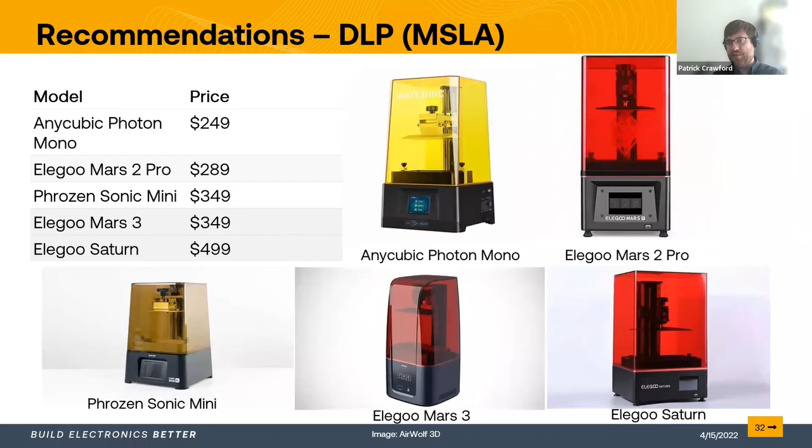For DLPs, or the MSLA, Anycubic is what you want to get. But if you can't get one of those, Elegoo is the next best. They have a lot of models and are kind of considered the king of lower-middle consumer grade resin printing. And finally, here is something I'm not allowed to share yet because it's a surprise.

If you're in high school, one of the best things you could do is start a 3D printing club, because a lot of school districts have funding for things like this. Talk to a teacher, put together a proposal, bring it to your department head, and eventually the principal and wherever else it needs to go. It'd be very cool—you can get a few printers, hang out with friends, print some stuff. If you're in college, I can guarantee your physics or engineering department already has these things just falling out of the ceiling.

I can't remember the name of mine when I was in grad school, but there was just a room that had like 15 printers and you could come and print whatever you wanted. Get involved.

And whatever any of you do, build a portfolio. If you print something someone else designed, cool—take a picture of it, especially if it looks great. If you print something you've designed as part of a project or research, like when I wanted to hook a mini fridge up to a Mountain Dew dispenser and distribute it throughout the house, here's how I printed fasteners for that. Throw it into a portfolio, put it on a personal website, and link to that in every resume you put together. It just has to be a link or QR code. It looks really cool, trust me.

And the last thing I'll say as far as career is concerned: don't be afraid of how complicated some of these industrial machines look. Go in, be cool, be confident. All of these machines you can figure out, I promise.